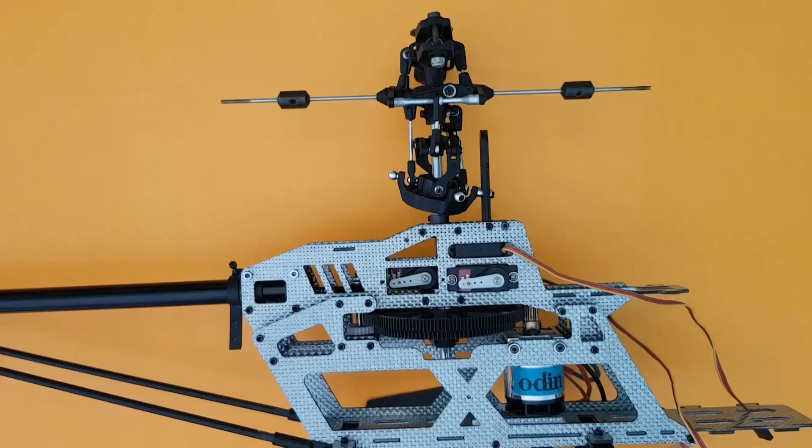Here we go, guys. I've already fixed the flybar equidistant completely. Also, please don't forget there are grub screws at the bottom of the flybar cage, and grub screws on the top. Don't forget to tighten both of them. I've got the flybar weights at an equidistance from here to here.

Now the next part is the flybar paddles here, so we need to start inserting them. It's simple, I just hold it and start turning and screwing it in, making sure both this flybar paddle and the other side's paddle are equidistant from the center, from here to here. What you can do is take the length of the entire threads, complete them, and just turn by one or two more.

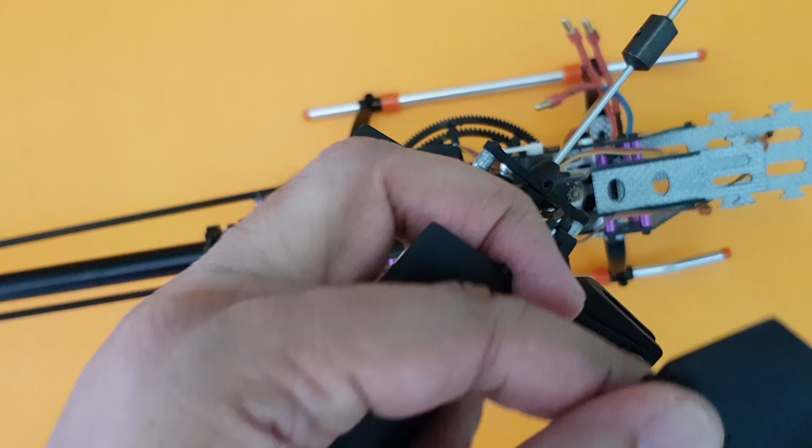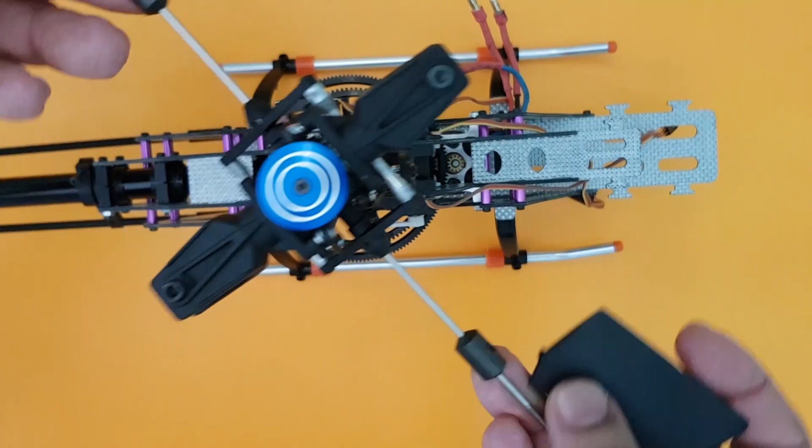Very important: you need to make sure this is turning in a clockwise direction, and this is the leading edge of the flybar. That means this should be facing in this direction, not like this. Let me place it here to show you. The other flybar should be facing this same way, so when they turn, they cross each other in a clockwise direction. Let's go ahead and fix this entire thing and be back in a few minutes.

Another thing I wanted to point out: if the flybar is not going through the flybar rod easily, you just have to open this opening a little more. Take an X-Acto knife or your star screwdriver and remove some plastic at the opening. I'd prefer to use an X-Acto knife like this, place it inside, and very lightly remove the plastic so it chamfers itself. The opening will be slightly larger, making it easier for the threads to catch and move inside the rod. Again, don't tighten it too much, let it go all the way as much as possible.

We have installed the flybar paddles now, equidistant from here to here, very equally placed. Everything seems fine, and this is the leading edge. So when they are turning clockwise, the leading edge should actually cut the air. Make a note of that.

When fixing the flybar paddles, also make sure the flybar paddle on this side is in line with this one. That means the leading edge and trailing edge should literally pass through the screws. When you look from here, you can see that. So this is the right angle, meaning this should be parallel to the flybar cage. The same has to be done for this side. Let me show you - yes, it's done. If not, turn the flybar paddle, hold it with a plier, and twist it so you get the right angle and it's parallel with this.

This is finished. Now the next part is the tail control rod, or tail push rod, which you had removed from the tail boom packet. You also need to open package number 6. Here you will see two small units - let me show you, let me come a bit forward. You can see these two small units here. You need to remove these from the packet, and we'll insert this here in this fashion and super glue it, putting a drop of CA on both ends. That's stated in your manual, on page 11.

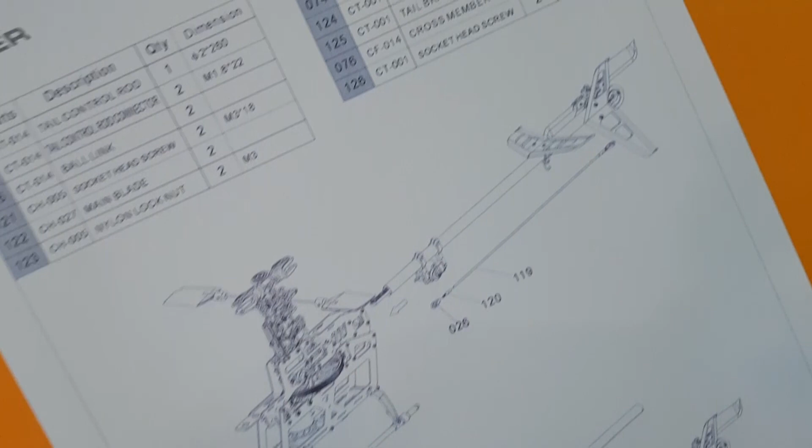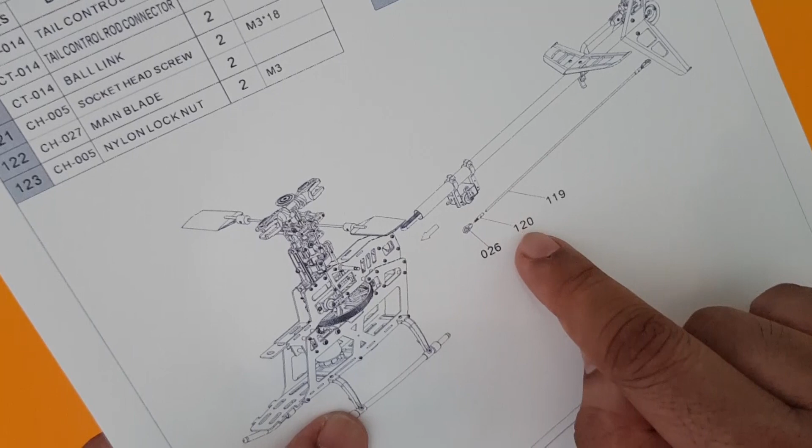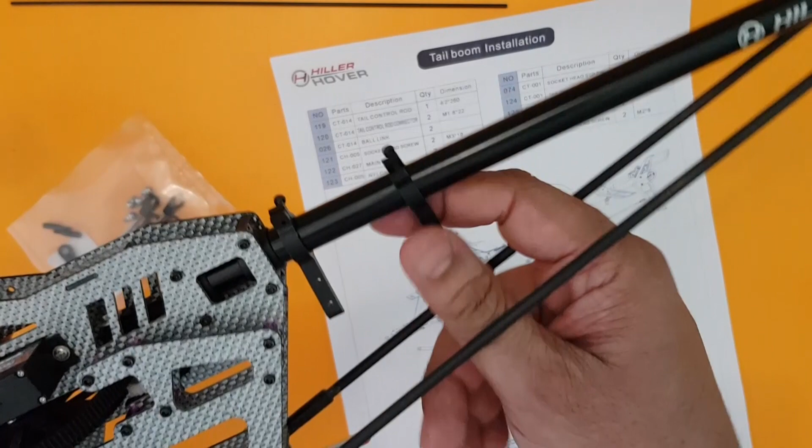You can see this entire unit, this is how it fits. This is the tail push rod, and then you have the two small units I mentioned - those are the tail control rod connectors, this one and this one. You just need to fix it properly and then apply super glue. Then we'll push in the ball linkages here, and these will be fitted here. So this entire unit is where we will fit in.

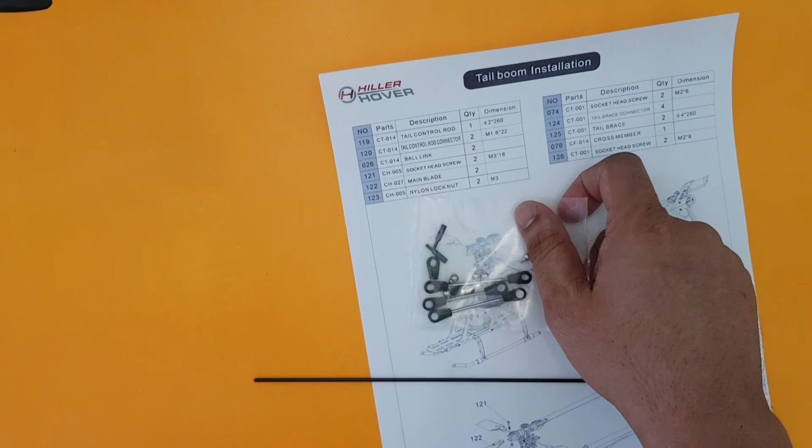Now I will go ahead and open the packet, and let me check if I've got a cutter in front of me. Let me do that right now in front of you. Yes, I do have it. Let me just cut this out.

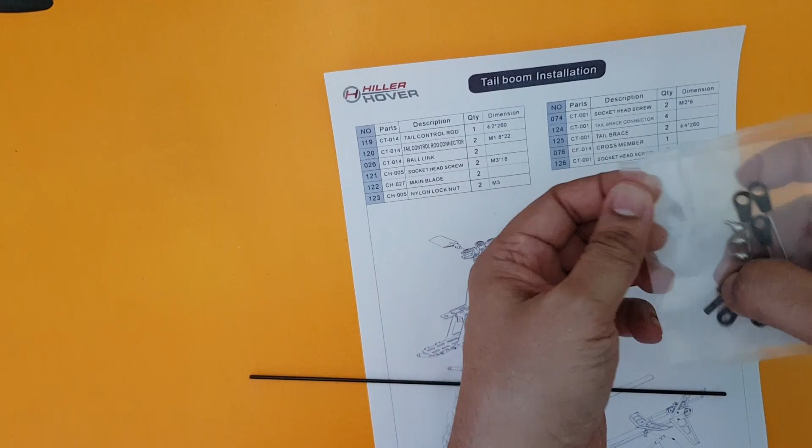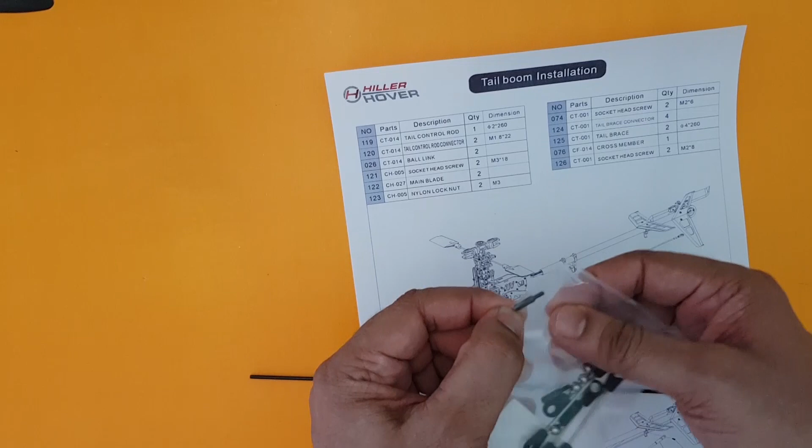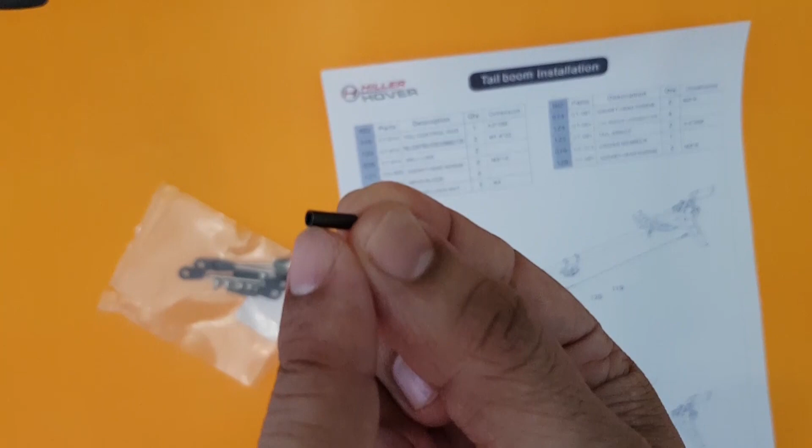One of the tail control rods here. All right, here it is. What you need to do is, you can see here it is. Here's the hole. You just have to push it inside.

Now if it's a little bit tight, what you can do is sand it a little bit. Be careful, again, this is carbon fiber. Don't let any of the carbon fiber dust go inside your lungs or your nose. So sand it carefully here and then push it inside, and then you can put a dab of super glue or cyanoacrylate on this.

So the same thing, you will have to do it on this end too. So once you do this, we'll come back to the next step. All right, as you can see, I have gone ahead and fixed this inside. I had to little bit sand the opening of the carbon fiber, and I have also placed a drop of cyanoacrylate super glue here, and the same thing I've done on the other end.

And also in the same packet, which is Hiller Hover number 6, packet number 6, you will also get this kind of ball link. You'll get 2 of them. So what you need to do is just go ahead and take one of them, and you can see this part is threaded. So you have to hold this and slightly and carefully go ahead and thread this.

So what I did was, I had got a small plier here. I held it up and I started tightening this, and tried to go as straight as possible, and go all the way in and leave about maybe around 2 mm of space from the end, because we might have to make some few minor adjustments later.

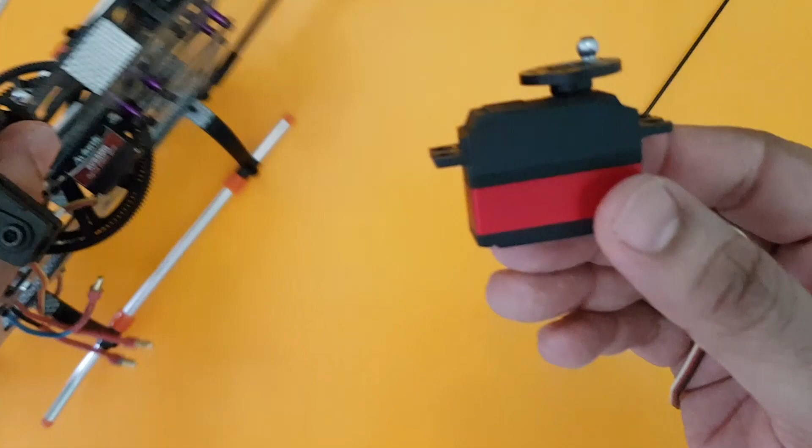And let's start fixing up the tail servo here. For the tail servo, I had one of my old servos, the Avionic 9257 high speed 22 gram servo. This is quite a good servo, it's quite fast. What you require is not huge torque, but what you require is speed, especially on the tail servo. So pick up a servo which has got a good speed, and I have used one of these circular arms here, and this is how I am going to install it in this manner.

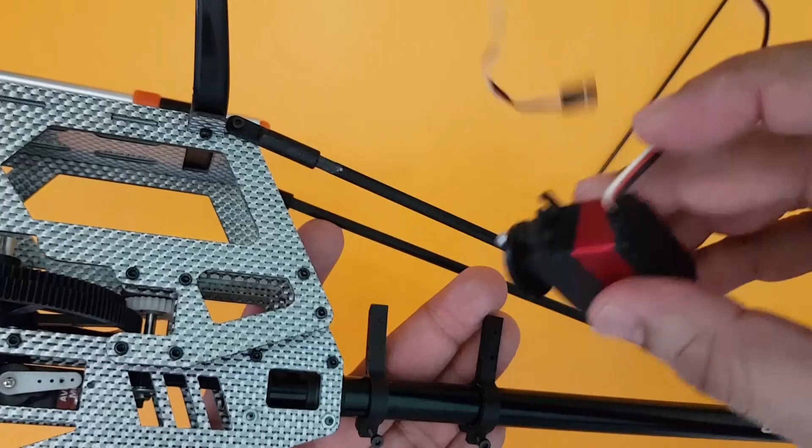And I will have the ball link facing towards the frame. This is the way. So I will start fixing this in a few moments, and after I fix it, I will show you how this entire thing looks, and we will come back.

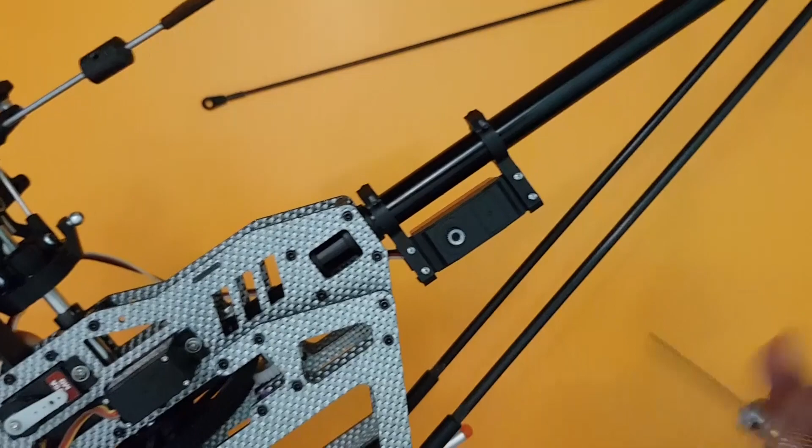As you can see, I have fixed the tail servo here, and importantly, the way that I fixed this, you can see the output shaft of the servo. You can see a long gap here, a short gap here. That means to say the output shaft is facing towards the frame. Don't turn it the opposite way. So this is the right way.

And the tail servo holder, I've used these 4 screws that came with the servo that I had, and I fixed it. And you can see there are some extra protrusions of the screw coming out. I'm going to take a Dremel later, and I will cut this off. Otherwise, when moving around, it will hurt your fingers, and maybe some of the wires will also get cut. So for safety's sake, I will go ahead and cut these 4 protrusions.

And later, this is the tail control push rod. As I stated earlier, one part will go here, one piece will go here, and the other part will go across here on the servo. These things we'll do later. We don't have to worry about this right now.

So what we have done right now, just to recap, we have finished the entire head, the frame, the tail, servos have been fixed, the tail servo has been fixed, the belt has been placed in the right direction. So this all encapsulates number 3 part of the video.

So let us proceed next to part 4, where we will start pulling out our radio. We will start setting up the servos, we will start subtrimming them, we'll get them to level and level the swash. We'll have to use a gyro, we'll set up the servo, etc. So that will be completely in a different segment of the video.